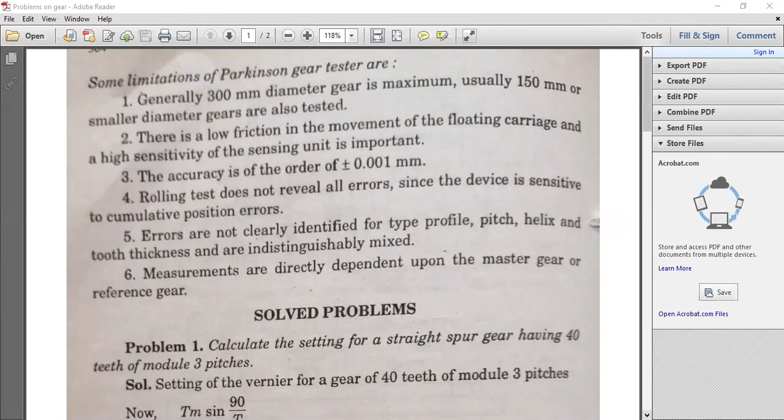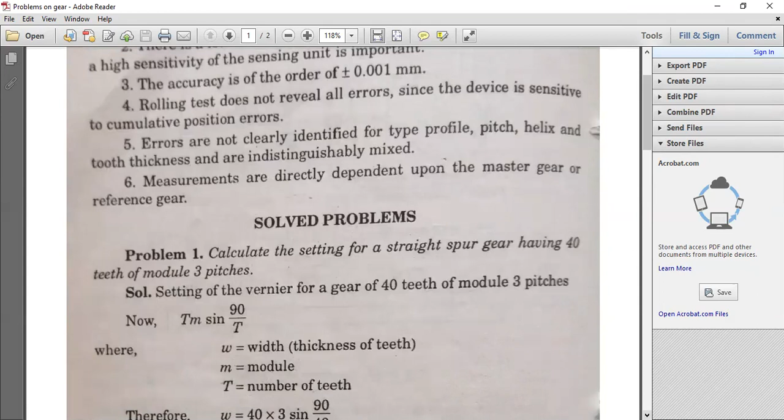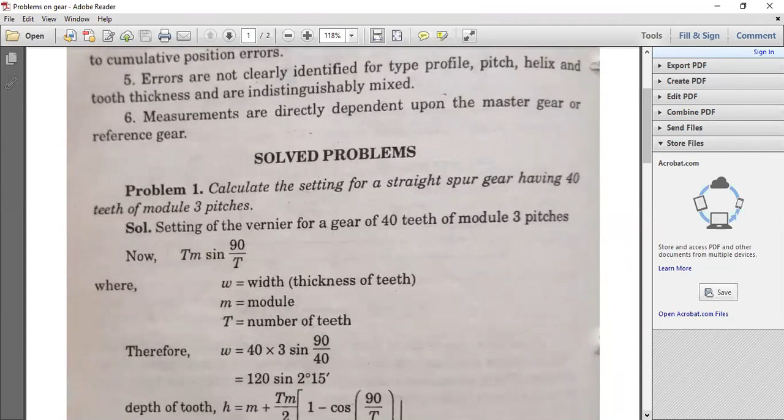So actually, the particular settings of this straight tooth spur gear, already I told you, whatever gear checking we are doing, it is only for the spur gear metrology, and it is about the parallel teeth or straight tooth spur gear. And here in the problem, he has given the number of teeth as 40 and module 3 pitch. What is the meaning of M is equal to module? It is of value 3.

So if you want to go for the setting of the vernier, first of all, already I told you, in the vernier gear tooth caliper method, you have two verniers. One is the horizontal vernier for checking the width or tooth thickness, this one W, and the second one you have to ascertain the height, the depth of tooth. So at this particular height setting, you have to check the gear tooth thickness W.

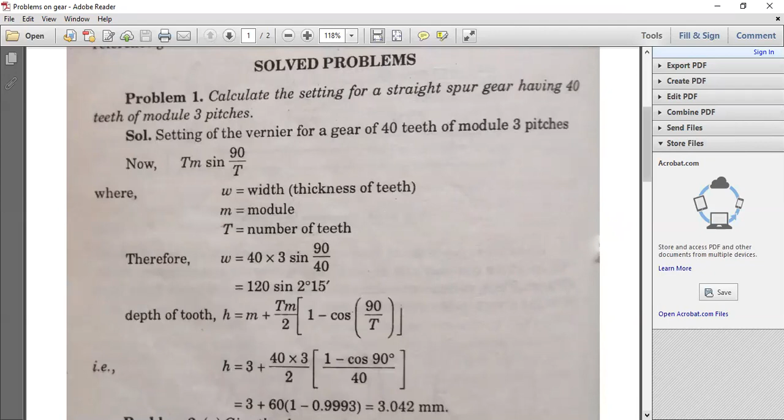Okay. You just keep it aside, and the depth of the tooth we have already seen in the derivation. You try to simplify this value now: 120 into sine 2 degrees 15 minutes, and tell me what the answer is. I'll be waiting for you. I'll be giving 1 minute time.

We are very sorry to say that some people cannot operate the calculator also, in spite of coming to third year, second semester, so we try to be careful as far as that is concerned. So H is equal to M plus MT by 2 into 1 minus cos 90 by T. This is the derivation we got for the chordal thickness method. So you are getting some value. Tell me how much value you are getting upon substitution. Just try to see this number.

I'll try to see who has attended, out of 34, including me, it is 35. We have to welcome some new people today. Maybe they just wanted to come as a visiting professor. So some of you try to put in the chat the particular value of W and H, whether you have got that value. Lateral entry, or 47, or Ajay, Ajad. So many people are there now. Pawan Kalyan, Durga Prasad. All of you respond. Because if it's one-way traffic, it won't go.

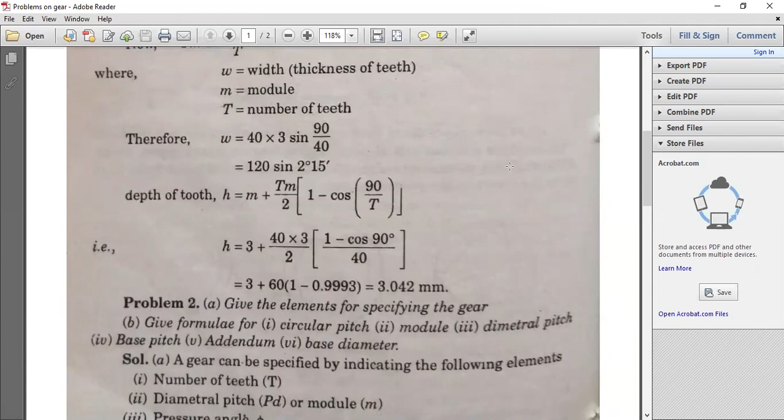It may be simple, but you may forget the formula or put some sine values wrong. And you have to see how to convert degrees into radians and radians into degrees. So try to be careful here. You don't have to convert for this one, but there are some problems where conversion is needed. And here the second problem asks to give the elements for specifying the gear.

So what are the elements? We have the number of teeth, we have the diametrical pitch, module, and the pressure angle. So what are the important parameters? You have to specify all of them as per the gear terminology, and you have to give the formula for the circular pitch. So what is circular pitch? PC equals pi m. Module is the ratio of the pitch circle diameter to number of teeth.

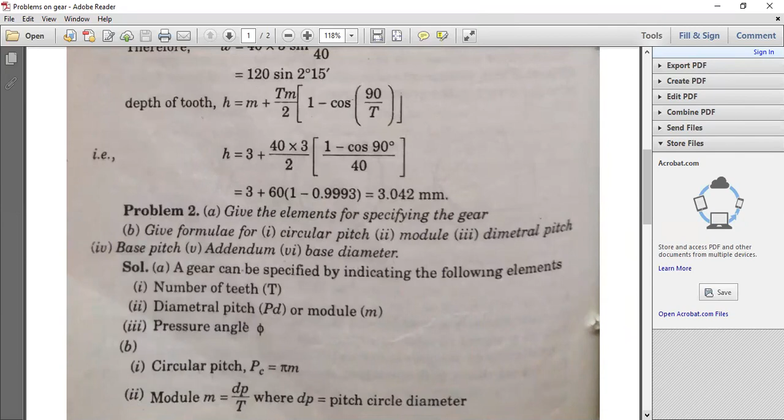So what is the diametrical pitch? Diametrical pitch will be equal to the inverse of the module, number of teeth by pitch circle diameter. So what is base pitch? You have already established a relation in the base pitch measuring instrument. If you know PB and know the pressure angle, you can find the circular pitch. PB is equal to PC cos phi. So all that terminology and the formulas, you try to keep in mind.

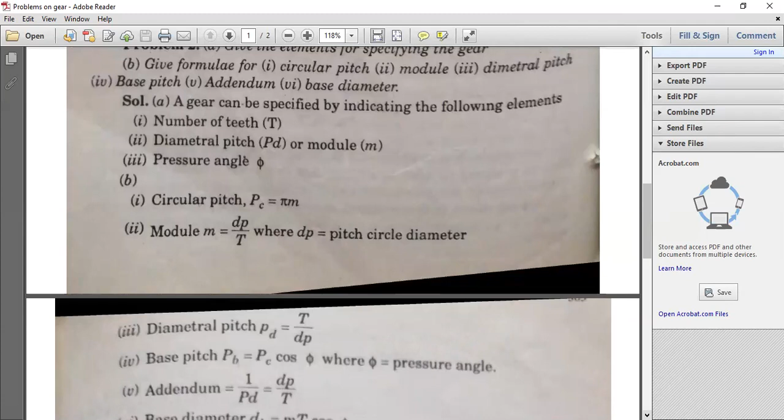And what is addendum? Addendum you can take as one module, or it is the inverse of the diametrical pitch. So if you know the module value, you can take the module value directly. But if module is not given, you try to find out the diametrical pitch and take the inverse of that. So actually, the diametrical pitch is number of teeth per pitch circle diameter, and addendum is the inverse of that.

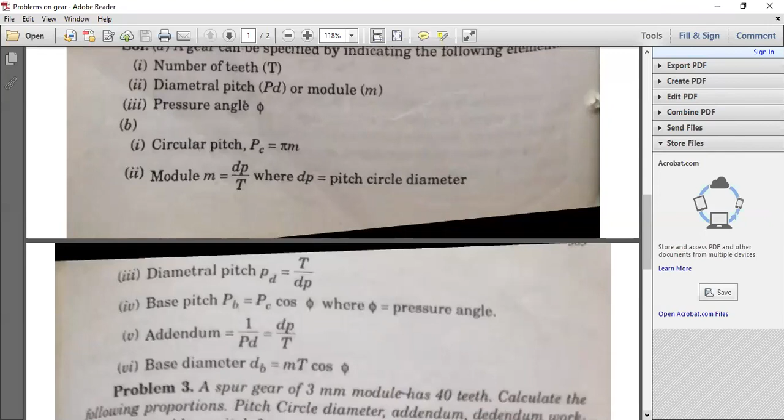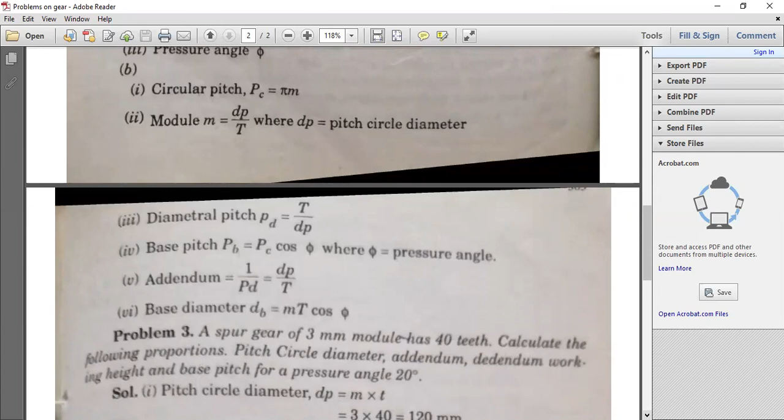And what is the other thing? Base diameter. Base diameter means the base circle diameter. Already that was established in the formula mT cos phi, m is module, T is number of teeth. So all this is for the formula's sake. So we'll go to the third problem. It may be small, but these are fundamentals; you just try to remember, and if you forget the fundamentals, then you'll be in trouble.

So the third problem is we have a spur gear of 3 mm module, having 40 teeth, and we have to calculate the proportions like pitch circle diameter, addendum. We have discussed all that. So what is clearance? Dedendum minus addendum. And addendum can be taken as one module, that is 3 mm. Dedendum is equal to addendum plus clearance, and in the theoretical discussion we can take clearance as 0.25 module. So m plus 0.25 m, it is 1.25 m.

Simple. And pitch circle diameter is mT, module into number of teeth. Don't use small t, because it's case sensitive. It is capital T only, because some authors may not have followed the standard notations, lowercase and uppercase. And what else? He has asked for the working height. Addendum, dedendum, working height. So what is the working height? It is the total depth, or the addendum plus dedendum.

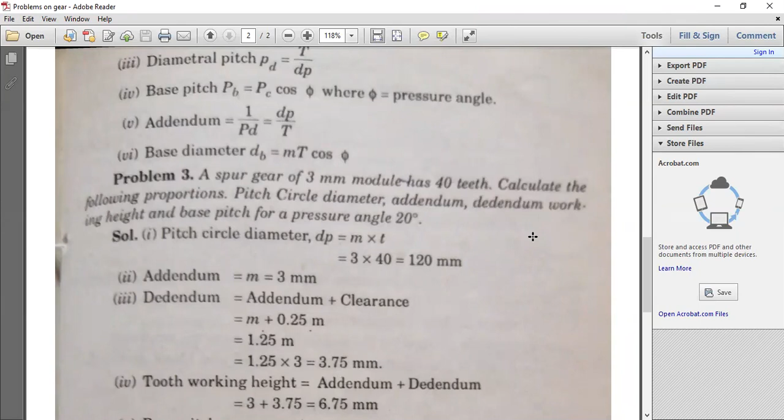What is addendum? As I told you, it's the radial height from the pitch circle to the tip of the tooth. What is the dedendum? It is the height from the pitch circle to the bottom of the tooth. So you should know the terminology and definitions. That's why you keep that diagram in consideration. Don't just write theory; you have to draw neat sketches. So addendum here is one module, 3. Dedendum you have calculated as 1.25 m, that is 3.75. This is direct, there's no twisting, but you have to know the formulas.

Okay, so what is base pitch here? Base pitch is m pi cos phi. Don't be confused with the base circle diameter. Base circle diameter is mT cos phi, and that's where students go wrong. So m is the 3 module, and the pressure angle is given as 20. Try to establish these answers and put all of them in a chart, apart from the first two. The first two are simple; you only have to know the formulas. The fourth one and fifth one.

And try to tell me the value of base pitch also. Put in the chart. Other than Durga Rao and Pawan Kalyan, I want from others also. Just simply say sleeping in Friday's fourth hour and Saturday's first hour. Only when we force you, you try to come and try to not concentrate on the class also. Only 50 people have joined up to now. I want all of you to respond to the base pitch answer. How much you have got?

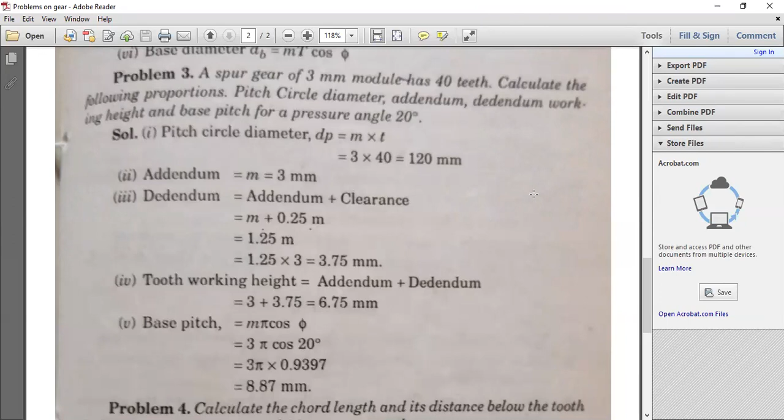Don't put some particular abbreviations in your register numbers 324. What is GN? You may be giving your short form of your particular name. Venkatesh. What other people have joined? Tarun, Ramana, Srimanarayana. All these people. Don't put your household names also.

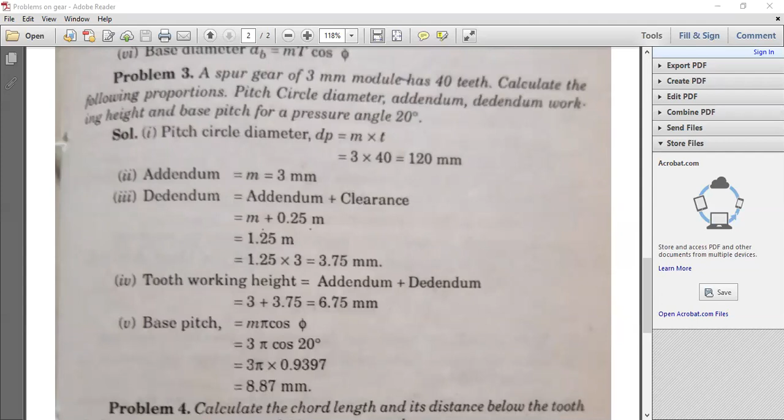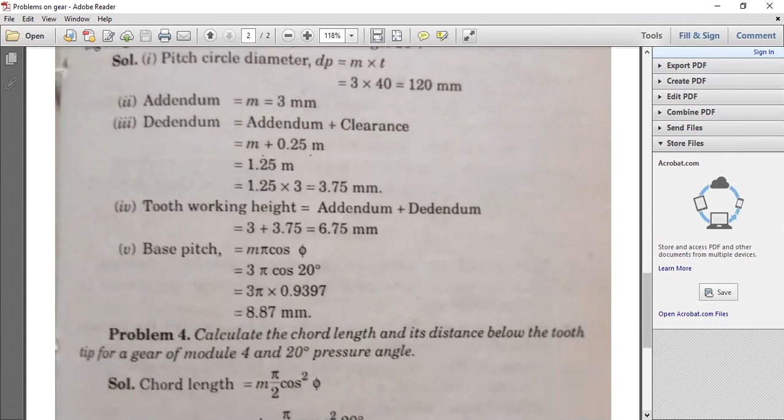So you have got the value as how much? 8.87. So just try to cross-check the answers. And the fourth problem is regarding the chord length. What is chord length? It's a second method to establish the gear tooth thickness. We have gone for the derivation also in the theory. And he is asking us to calculate the distance below the tooth tip for a gear of module 4 and 20 degrees pressure angle. Just try to see this also.

So we'll be sharing. Yeah, people are more worried about sharing of PDFs or lecture notes or PPTs. Try to concentrate in the class also.

So what is chord length? As per the basic fundamentals, m into pi by 2 into cos square phi. You just try to establish the answer. I won't go further. I just try to skip off the two small topics. Actually, it was not specified clearly, but they are part of the elements of gear checking, lead and backlash.

So this was the particular formula we have established. If you try to take m common, m into 1 minus pi by 4 into sin phi cos phi. What I told you, instead of going for sin phi cos phi, you try to multiply and divide by 2, numerator and denominator. You will be getting 2 sin phi cos phi is sin 2 phi. So this is the final derivation, m into 1 minus pi by 8 into sin 2 phi.

Okay, I don't want to specify any particular person. You try to establish the formula or the answers, and try to put in the chart so that we can move over to the theory, the final phase of this chapter. So you try to be careful, cross-check the formulas once again and your calculations also, because when I asked in the lab your previous people, they're not able to convert simple degree values into minutes or seconds, or somebody is telling 5.5 degrees like that. So it is wrong. You have to establish the angular measurements in degrees, minutes and seconds.

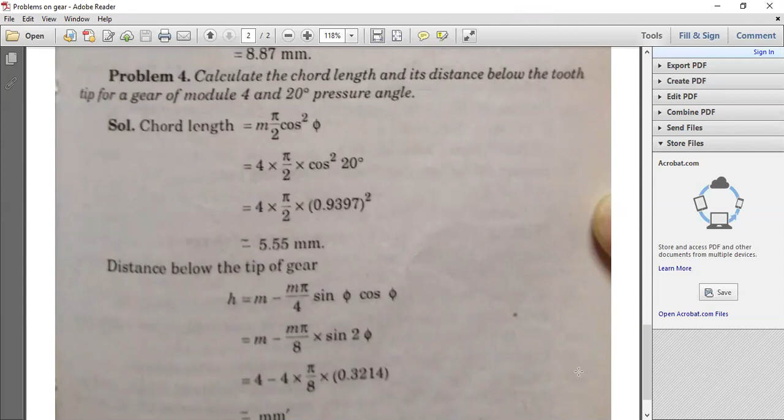So you have to know which button you have to press on the calculator also, because there will not be any additional training for that one. You have to learn, because already you are grown up and you have to know how to use the function keys and everything in the calculator. So we have already discussed the various sources of errors in manufacturing of gears. I don't want to touch that. And before leaving this particular problem, we'll try to go to the theory.

And again, I want to ask Pawan Kalyan or Durga Prasad and Durga Rao to tell me the answers, and then we'll leave, because nobody is responding, means even the lateral entry people are sleeping. I just told Mallikarjun and other persons, Tarun or somebody, because already it was there in diploma, not this metrology subject. I don't know, but you have to be proactive. All the people, not only few people. But still, 50% people are attending the class. It's a bad sign.

So try to tell me what is the distance below the tip of the gear. Here the answer is hidden.

Shall we stop the class? Nobody is responding, because in the beginning we had an internet problem and nobody is responding. Means what's the fun of taking the class?

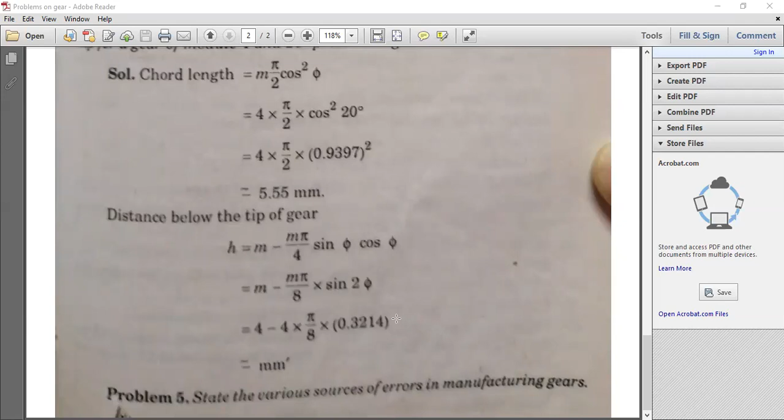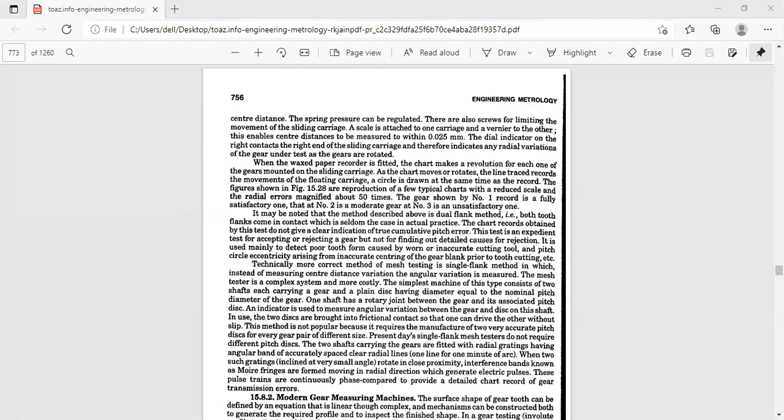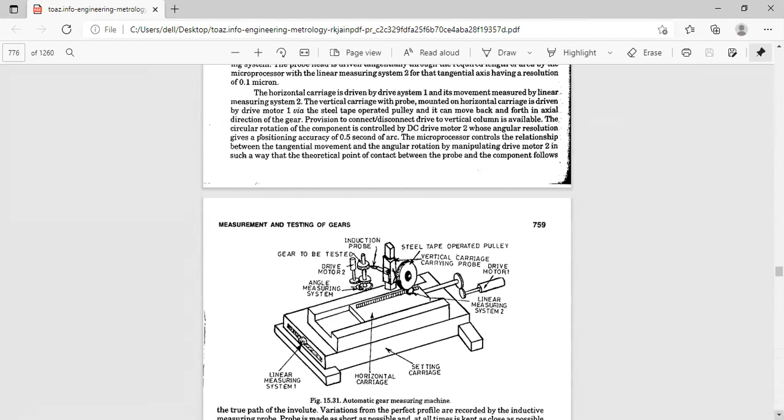Okay, so just stop the share and then we'll go for the lead and backlash checking. So what is the lead? In case of a screw thread, it is the axial distance advanced by the screw for one revolution. And for lead, we have the lead checking instrument.

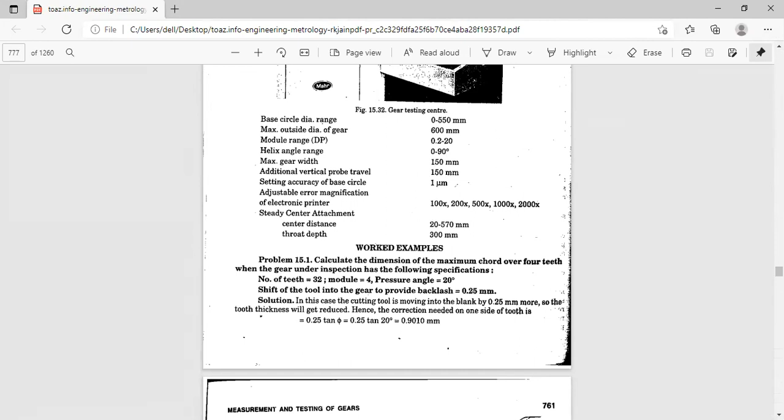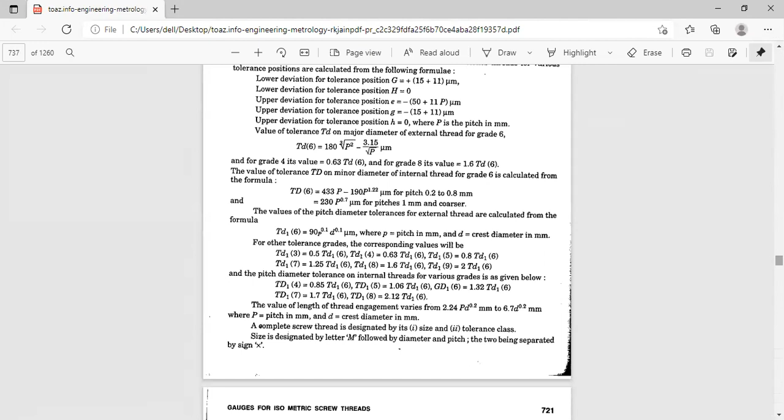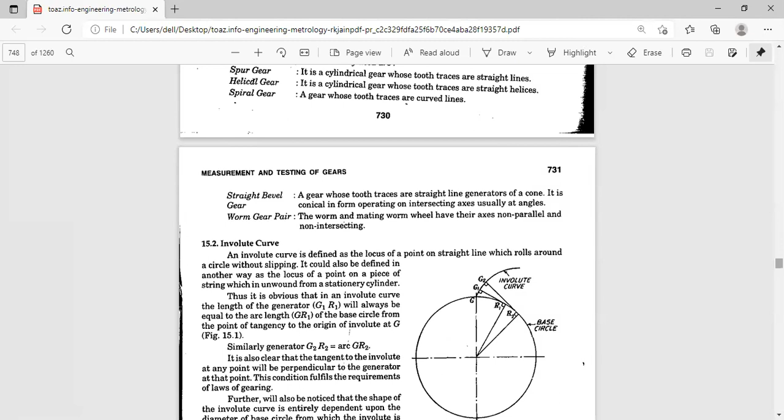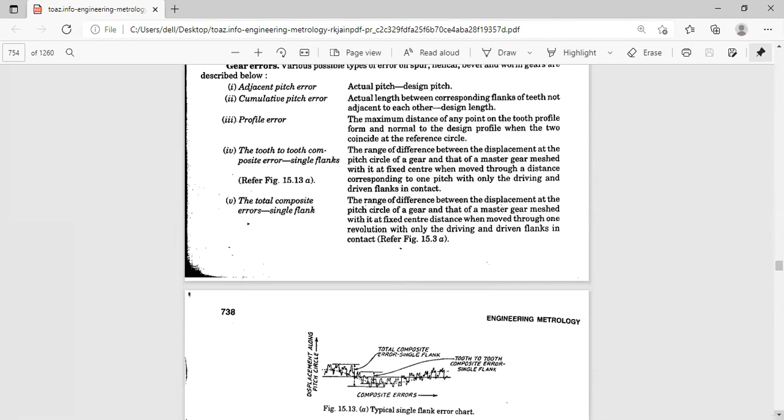And what is backlash? Already told you, don't confuse backlash with clearance. For backlash, we have to take a pair of gears. One gear you have to lock, and then the distance moved by the other gear you have to establish by a comparator or an instrument.

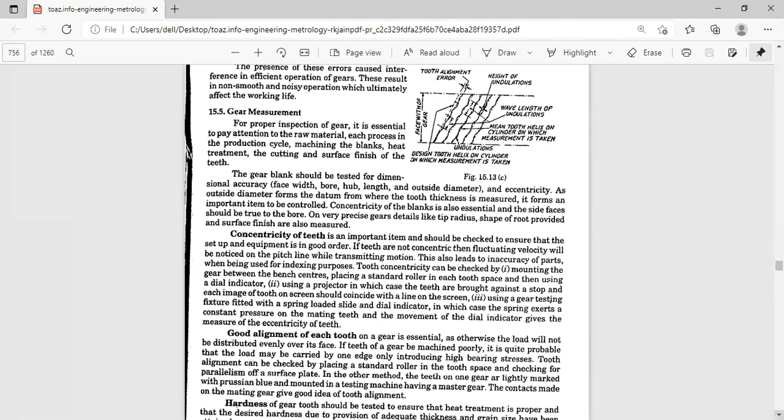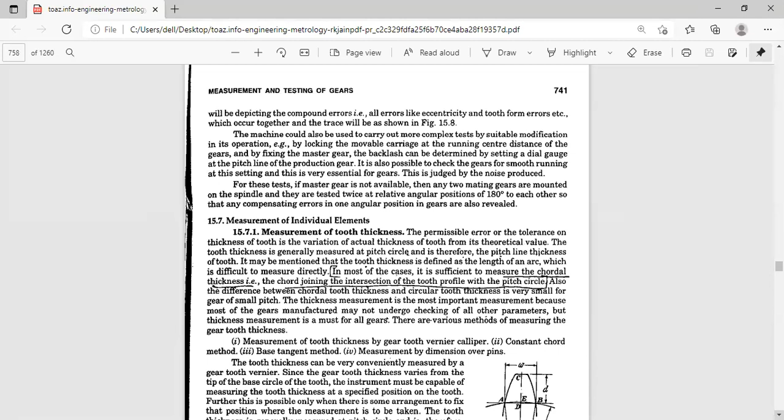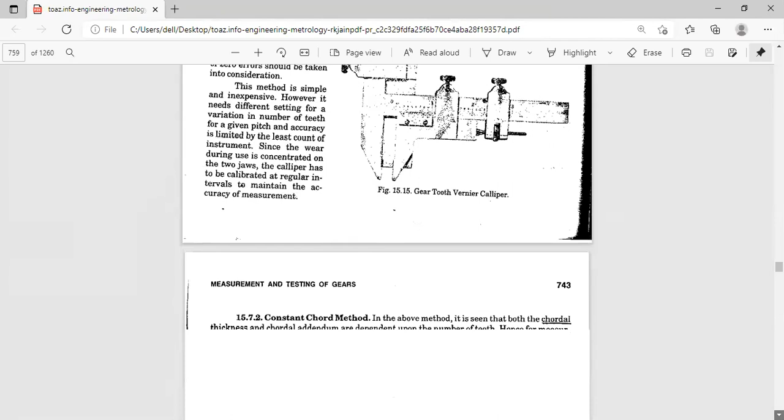According to the national standards, we have two types of backlash. One is the circumferential backlash and the other one is the normal backlash. Just like PB is equal to PC cos phi: you know one of the parameters and the pressure angle, you can get the other backlash. Okay. So these other things we have finished. I just want to concentrate on the problems. I don't know how many followed.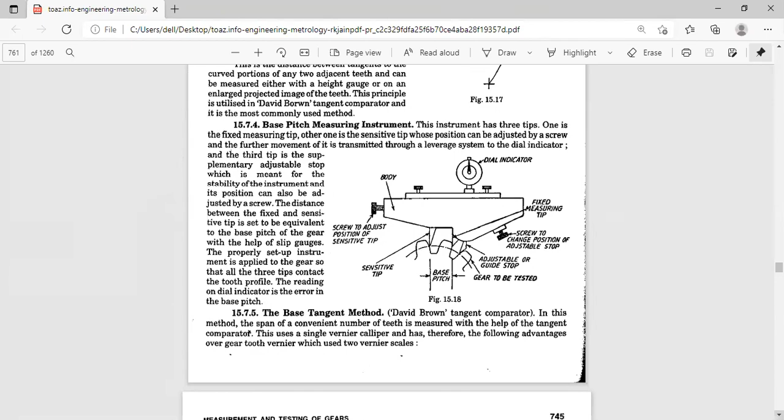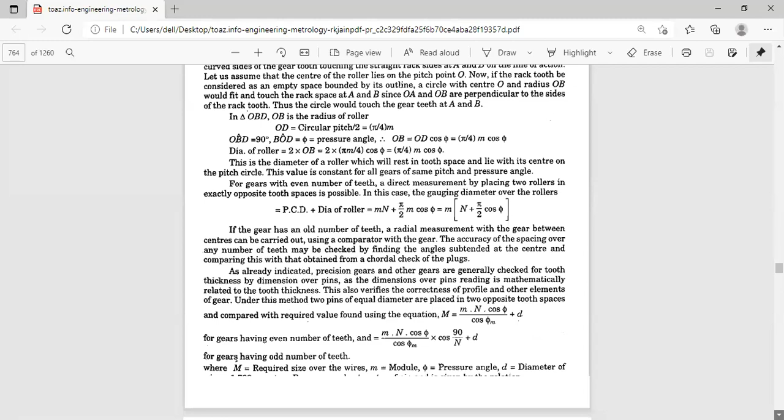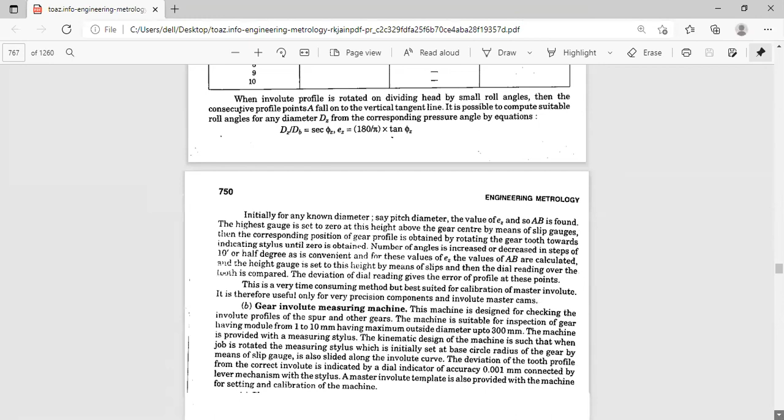All the other parameters we have finished except these two. Actually it has not been given in the syllabus; I don't know why he has not mentioned it clearly. So we have to just go for this one. We'll just try to check them, because yesterday we have seen runout also. Already I told you, you can check it in the Parkinson gear tester also.

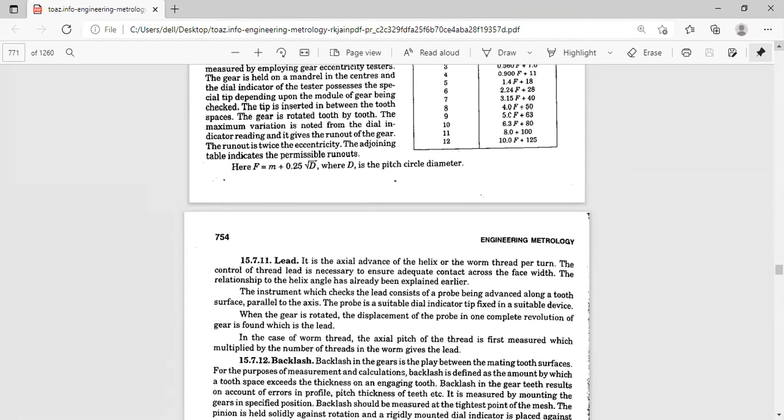If you find out the eccentricity of the gear, you have to specify it with reference to the reference circle or the pitch circle. Whenever the gears are eccentric, you will have gear noise. Why do we have gear noise? Because the gears tend to have vibrations as they rotate, or you will have an eccentric tooth, which may cause gear failure, and runout of the gears. How do you measure it?

Directly you are not measuring runout. Runout can be classified into three categories: axial runout, radial runout, and side runout or wobble. In those directions you have to check the gear. Already we have seen how it is checked, but I want to touch upon this table. How many classes or grades of gears are there? There are 12 classes or 12 grades.

You have to know these formulas exist. For first class we have 0.224 F plus 3. You don't have to mug it up, because design data are given in the design subjects, and in the gear manufacturing shop we have tables where you can calculate the value of F. Suppose the module is 3 or 4, you calculate it and substitute the value of F in 0.224 F plus 3. That's how you have to see it.

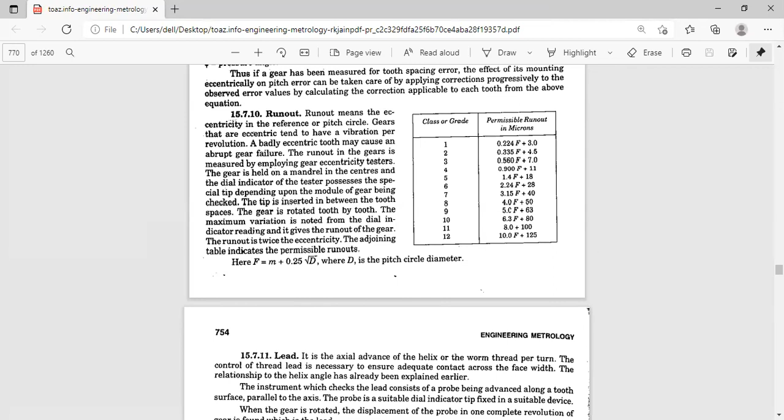Already I told you. So like that, depending on the directions, what I told you, an arrow symbol is there in the production drawing as far as the radial runout is concerned, whether it's the axial runout or the radial runout. You have to put in an inclination direction, and all the three have to be checked. You don't have to be satisfied with only one parameter, because if the axial runout is correct, the radial runout may not be correct. If axial runout and radial runout are correct, there may be a chance of variation in the side runout or wobble. So just try to see that.

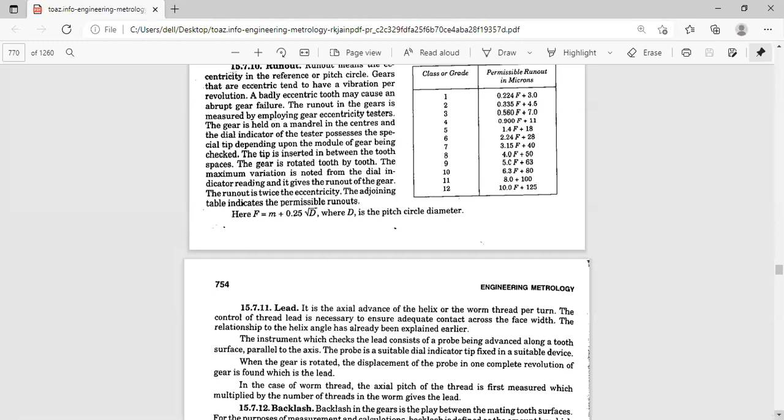And lead. What is the lead? Not lead, not pencil lead like that. So what is the lead? It is the axial distance advanced by the screw or the helix per turn of a revolution of the gear.

I want to just give a particular note here: whenever we are referring to the tip or bottom of the tooth, we are calling it crest or root, as I told when we compared to the screw thread, and that's also correct. But another way of expressing those terms is tip and toe, where you have a tip and toe in your human body, the anatomy of the human.

What is that? Tip and toe. Try to take your shoe off, or barefoot, and just check which is tip and which is toe. You just try to balance on the toe. Tip is the finger. You just try to see that. So you have to check the dictionary or somebody. Okay, it's an online class. I just ask people to see in the Webster dictionary through mobile what is tip and what is toe.

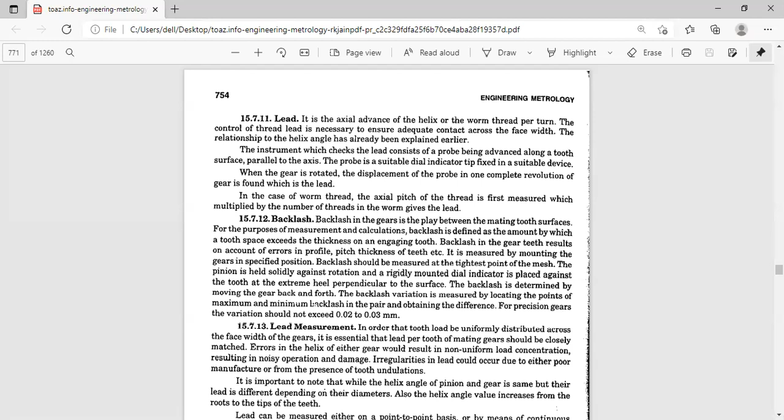So here also you have to see that in the helical gear, suppose though we are not having a syllabus, it may be universal knowledge you should have, because for objectives like SSC, RRB, SAIL, or management trainee exams, they will not worry about your particular syllabus. They may ask any particular question regarding other gears also. So whenever the helix angle of the pinion and gear are same...

helix angle alpha, the lead may still be different. Why? Because the diameters of the pinion and gear may be different. Helix angle may be same, but the pinion diameter dp and gear diameter dg may vary. That's the thing, and already I told you about the center distance also, the average of the diameters of the pinion and the gear. So just try to see that also.

Helix angle value increases from the roots to the tip of the tooth. So whenever anybody asks this in a viva or speech question, don't say helical gear is not there in syllabus, but universally I told you this for the objective competitive exams. Don't say it's from the tip to the root of the tooth, it's from the root.

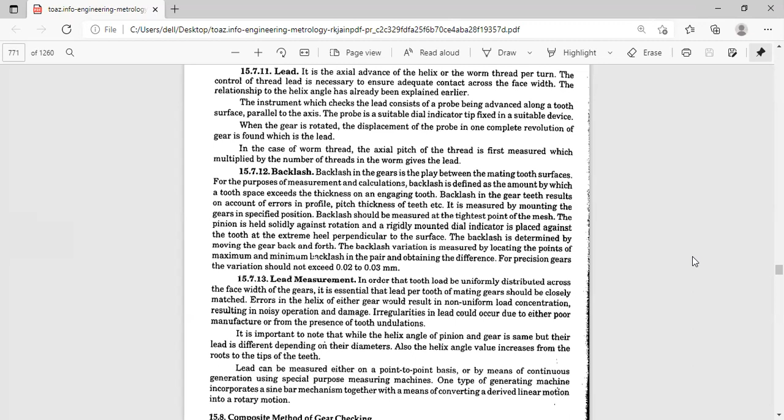Root means what? Dedendum. From dedendum to addendum, the helix angle variation will be there. So here lead can be measured either on a point-to-point basis, or you can generate it by means of continuous generation. You have to use special purpose machines, special purpose measuring machines here.

Okay, you can have that sine bar mechanism also. You know that concept in the second unit, where we practically establish the taper angle of a shaft using a sine bar. Then you can know what the mechanism is there, but here it is similar to the crank and slotted lever mechanism which works like that. Here also you are converting the derived linear motion into the rotary motion of the gear.

And last but not the least, we have the backlash, and backlash is very important. It is not given in the drawing. Why? Because it depends upon the application where the gear is to be used. The end user will try to sit with the manufacturing people or the design people of that particular company, explain the application for what they are using it, and then try to sit together.